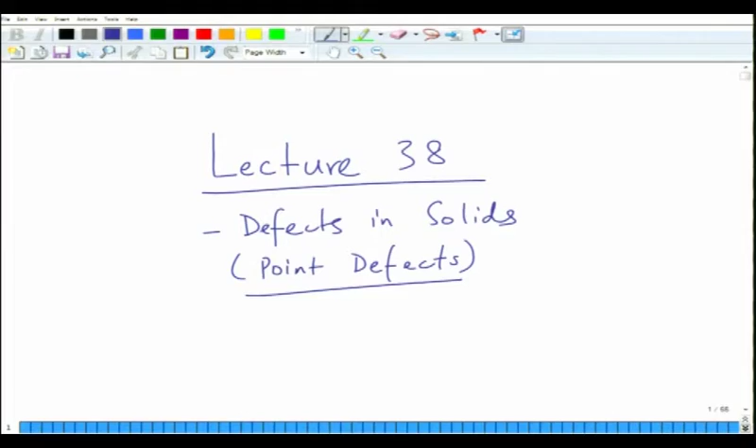Okay, so we now begin with lecture number 38, which is on defects in solids. This is the concluding part of our course, where these last three lectures will conclude this course on structure of materials.

What we have learned so far is about the crystal structures, the lattices, the structure of metals, the structure of alloys, the structure of covalent materials, structure of ceramics, structures of polymers and glasses. And finally, we looked at the structure determination of materials using X-ray diffraction. But so far we have assumed that the structures are perfect, okay. But structures are not perfect, like everything else around us. There are imperfections in crystals, which is what we are going to talk about in these next three lectures.

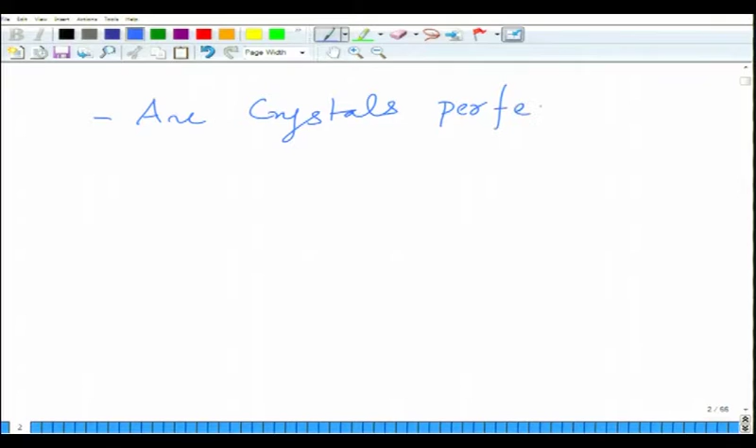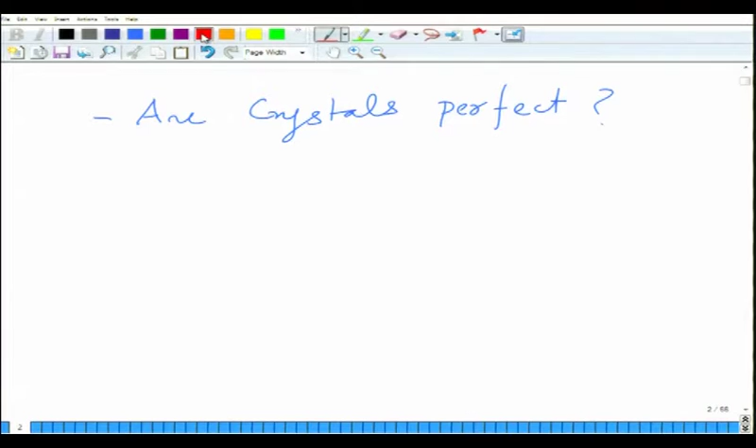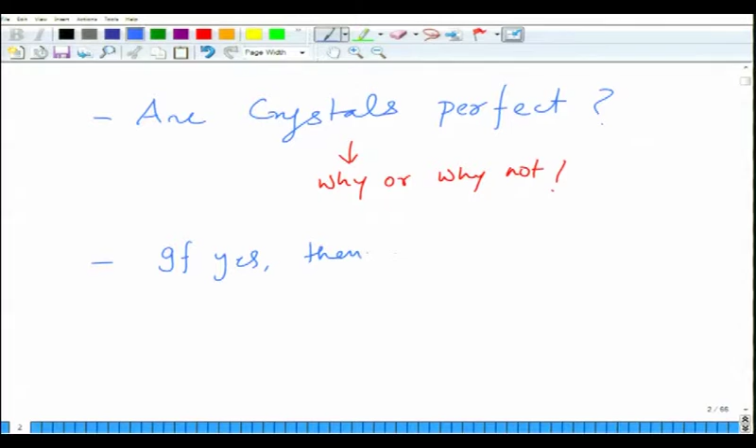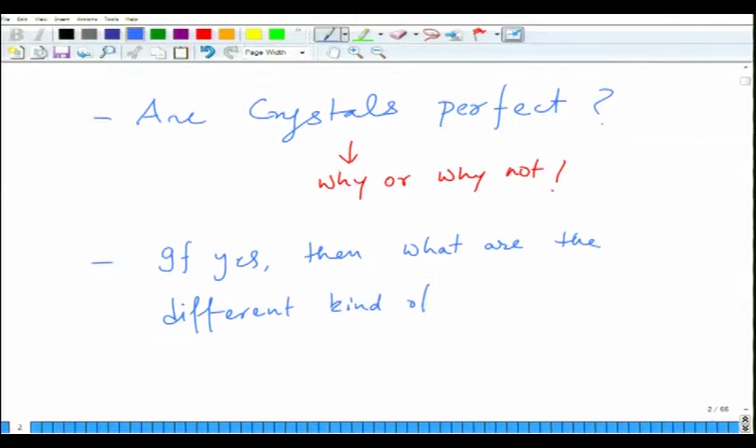So the first question is, are crystals perfect? And the second question that we answer is why, or why not. And then, if they are not perfect, what are the different kinds of defects? So let us first begin with the first question, are the crystals perfect?

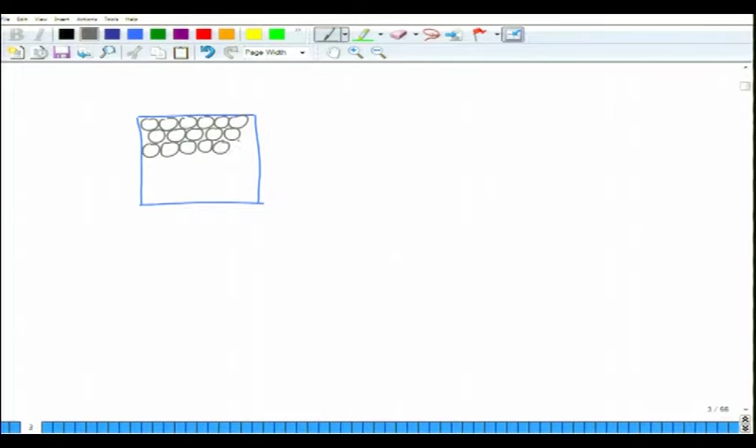Well, before we talk about the defects, let us first look at the atomic arrangement in a perfect material. So let us say we have a material in which atoms are arranged in this fashion, okay. So this is a periodic structure, but it is periodic across the whole volume of the material. So whether it is 1 nanometer, 10 nanometer, 100 nanometer, 1 millimeter, 10 millimeter or 1 meter, wherever you look, the atomic arrangement looks the same. So if it is a layer, it is a layer all throughout that surface of the material, and there is no other orientation that is present.

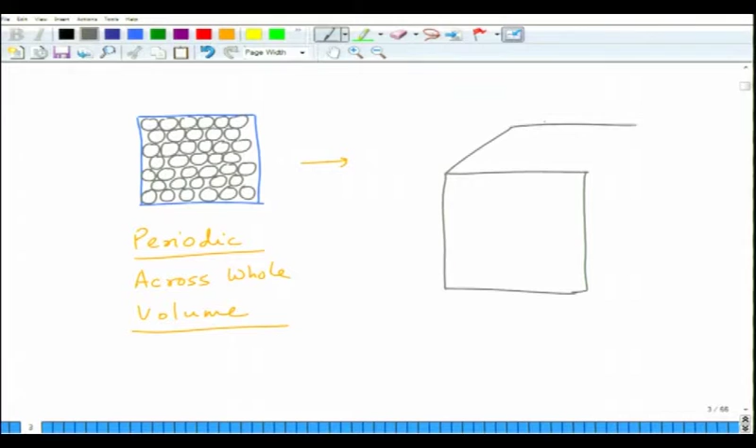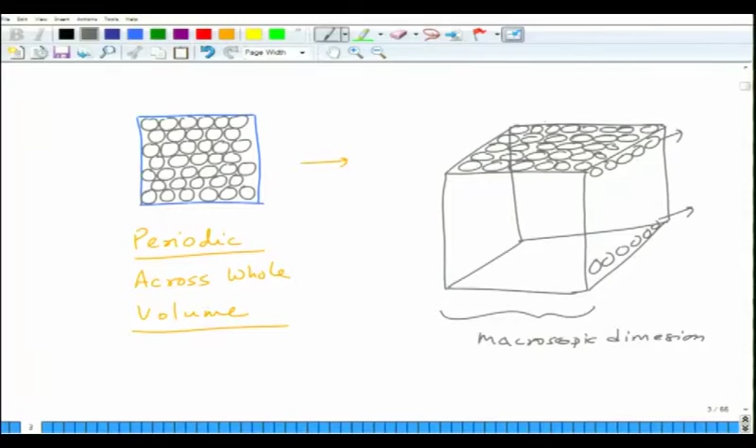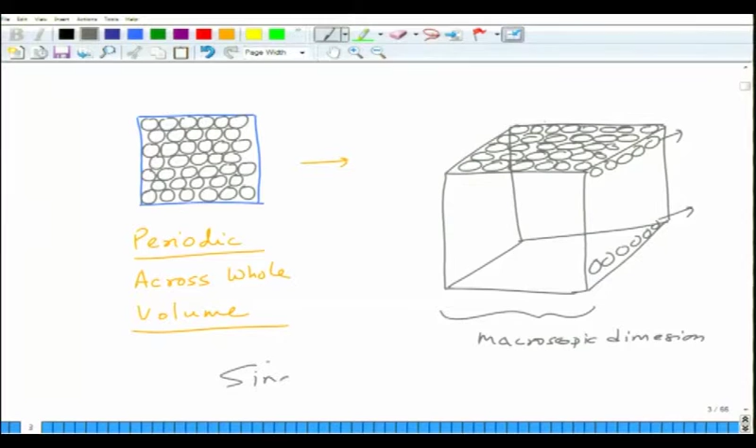If you draw such a crystal, for example, this is your crystal, and these are macroscopic dimensions, okay. And on the faces of the crystal, the atomic arrangement is the same everywhere. Whether you look here or here, it is the same there, okay. So the atomic arrangement on this surface is the same all throughout, similarly on this surface. So this is called a single crystal. There is no discontinuity in the arrangement of atoms, it is uniform all throughout the crystal. These are called single crystals. Now life is not very kind to us in most occasions.

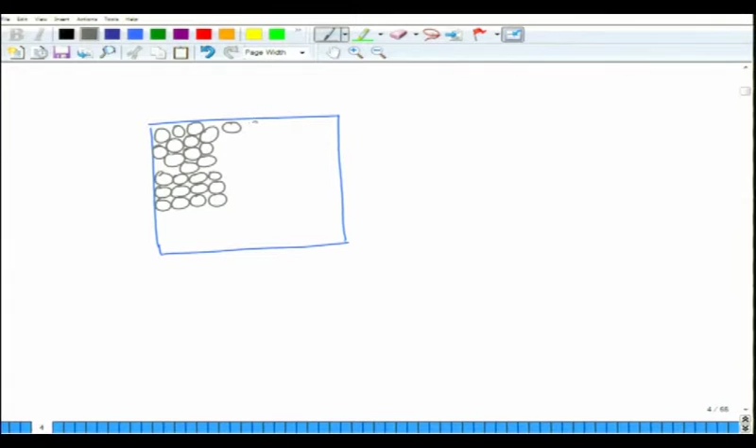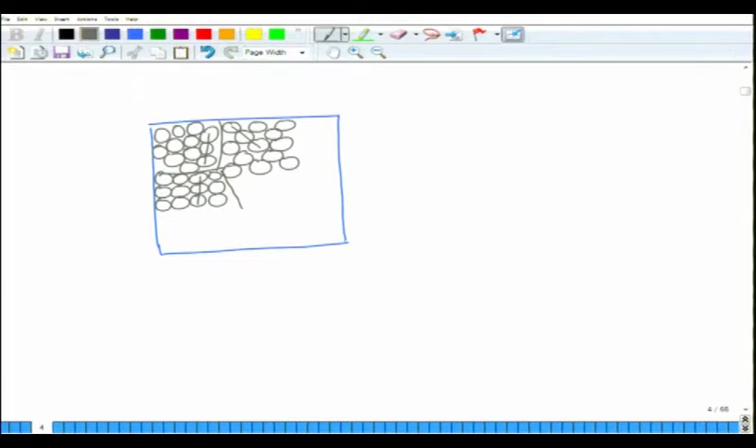What happens in reality in most cases is that materials are like this. You have an enclosed volume like this. Within one volume you may have an arrangement of atoms in this fashion, okay. In the next volume it could be something like this. And in the next one it could be different again. So you can see that there is a distinct change in orientation here, right. This is a different direction and this is a different direction and this is a different direction. You can see there is a distinct change in the orientation of the crystal across the volume. So if you now divide this into several regions, here it is like this, and here it could be some other orientation.

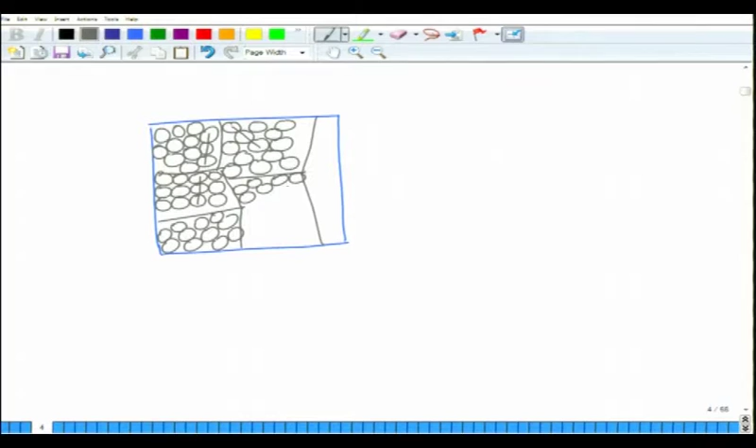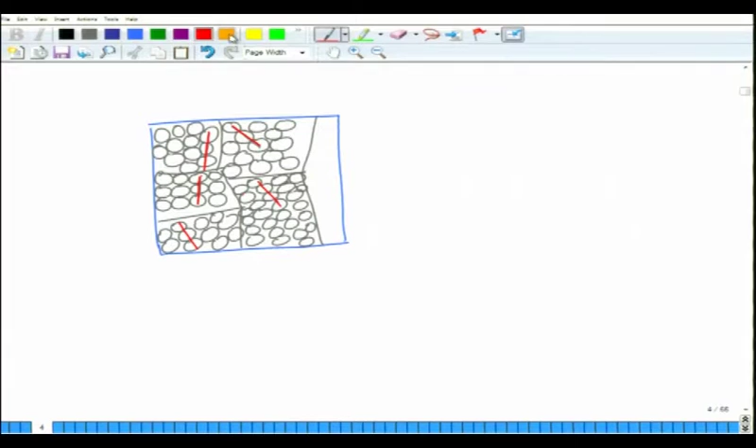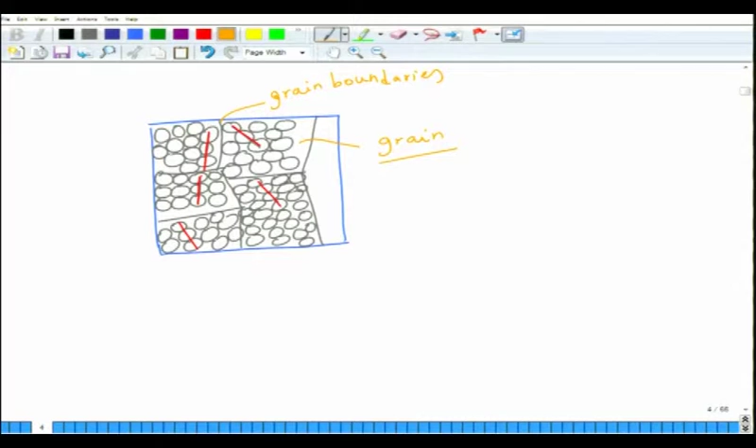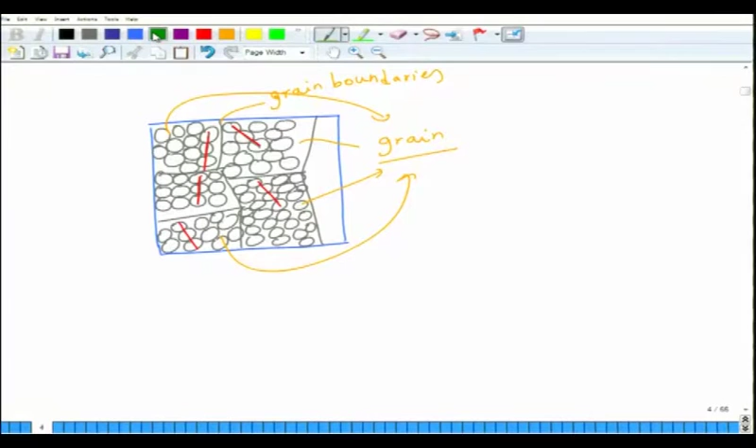If I take only the close packed direction, in this case it happens to be here, in this case it happens to be here, and in this case here. So it is all over the place, right. The same HKL direction has different orientation in different places, and these regions of different crystal orientation are called grains, and the boundaries between them are called grain boundaries. So one region of uniform orientation is called a grain, and where the orientation changes abruptly between the two regions, that is called a grain boundary. So this is a grain, this is a grain, this is a grain, this is a grain, and the discontinuities between them are the grain boundaries. This is called a polycrystal, or you can say a polycrystalline material, okay.

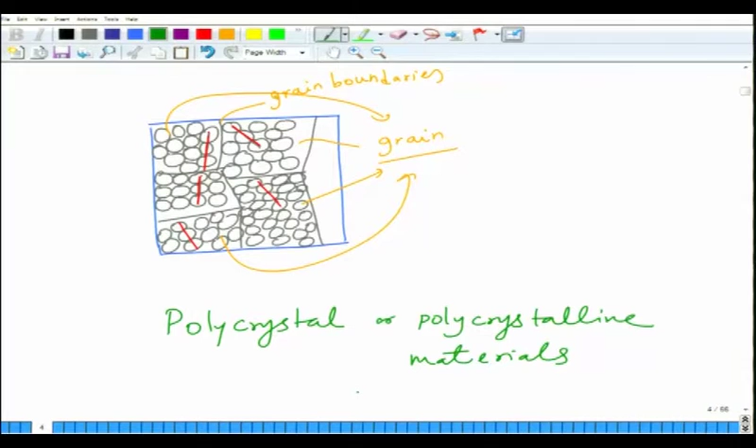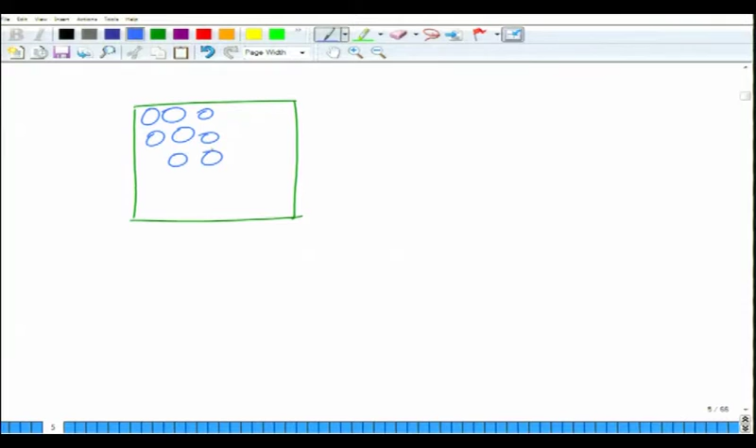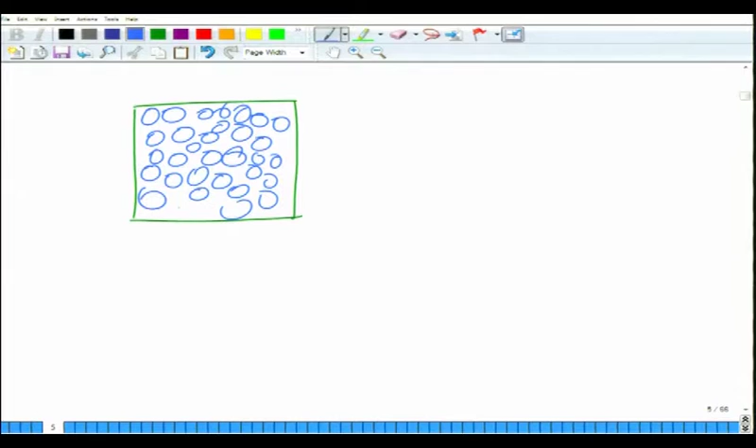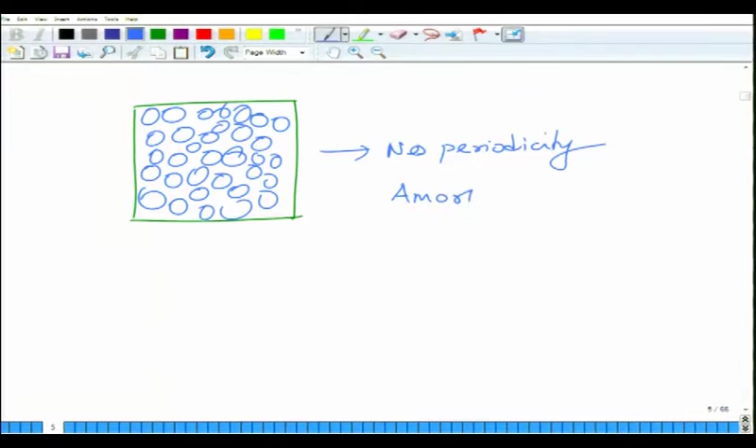Most materials happen to be polycrystalline, okay. So, grain boundaries do exist in most materials, and in some cases you can have atomic structure where there is no periodicity, okay, at least no long range periodicity, and as a result this is called amorphous or glassy solid,

okay. So, these are the three classes of materials which is basically dependent upon the length scales over which the atoms are arranged in a certain fashion. So, in a single crystal the atoms are arranged in a uniform orientation across long length scales, that is what makes a single crystal. It has a uniform orientation all across the surfaces, every face has a specific orientation, a specific arrangement of atoms. In a polycrystal the arrangement continues only within a grain, and the dimension of a grain can vary between a few nanometers to typically a few microns. It could also be a few millimeters, but generally it is limited to microns, okay, a few nanometers to a few microns.

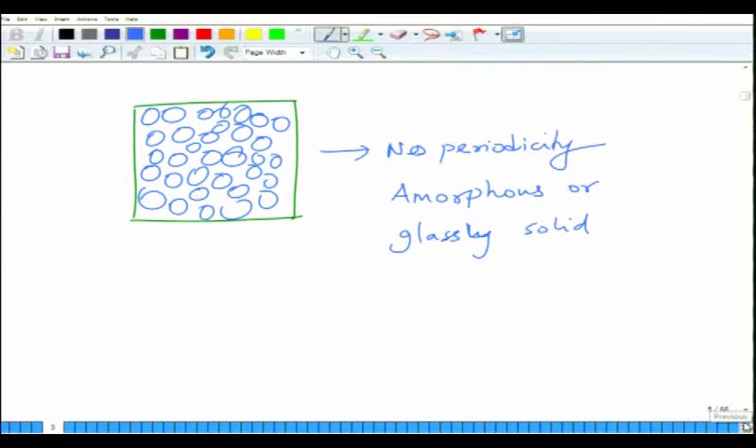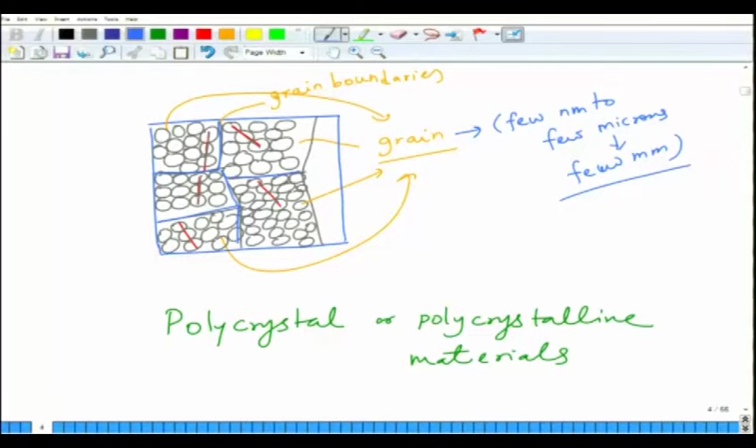This is a polycrystalline material. The moment it goes to millimeters, we call it a quasi single crystal, because you can break the material into small single crystals, okay. So, that is why we say it is a few nanometers to a few hundreds of microns. And then we have absolutely no long range periodicity. There could be periodicity on short scales like 5 nanometers or so, but the moment you cross that barrier there is no periodicity. These are amorphous structures. So, you can see that for example, in this structure there is a discontinuity; these regions are defects, okay, which are called grain boundaries. But there are a lot of other kinds of defects which are present in the materials, as we will see in the next few slides.

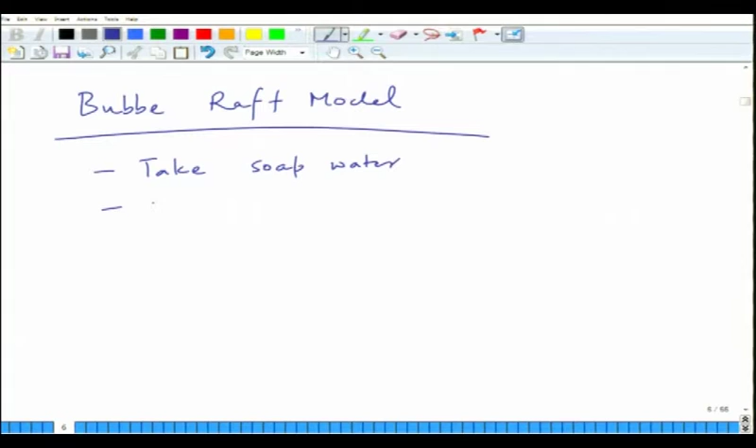So, one of the best representations of defects can be seen in what we call the bubble raft model. What you do is that basically you take soap water. I will just write the steps, okay. Take soap water, using a syringe create bubbles, just blow air into the soapy water, and then bring two rafts. So, rafts are located like this. This is your liquid, these are your rafts. Bring the rafts closer to each other, so that all the bubbles are within a region.

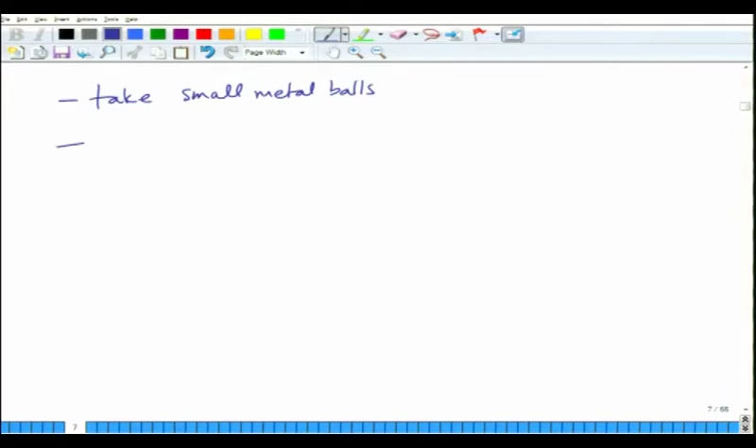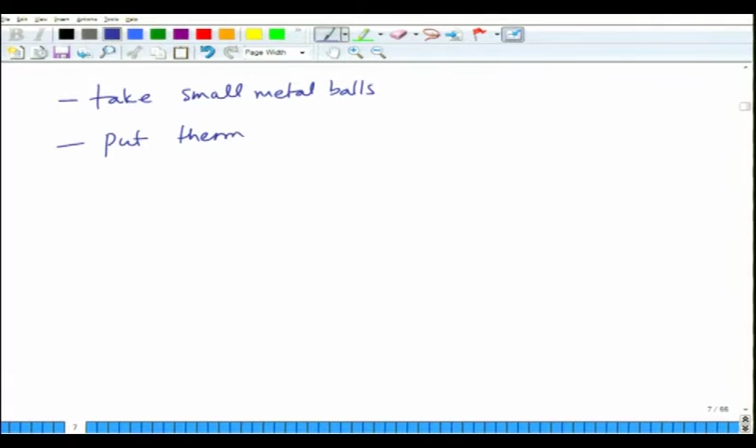Another way to visualize this is to take small metal balls, okay, hundreds of them, and put them between two plastic plates, and the spacing between the plastic plates would be the same as the metal ball, and so you create an enclosure so that it is full of metal balls, and then shake it. Just leave a slight empty space for balls to move around, and then shake it, and then let them settle down on top of each other, and you will see all sorts of defects forming. So put them between two transparent plastic plates.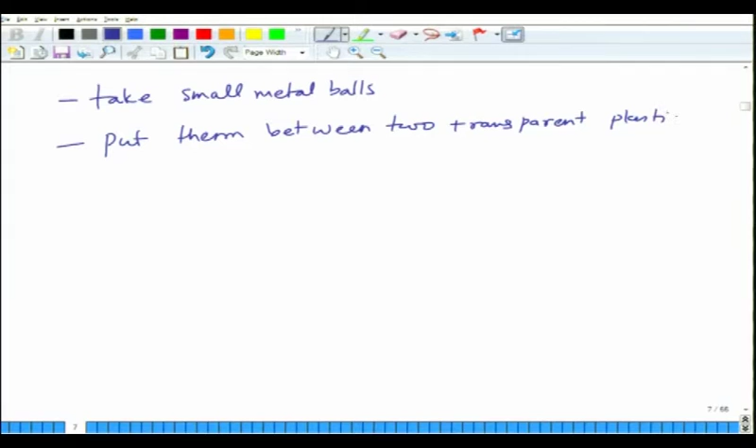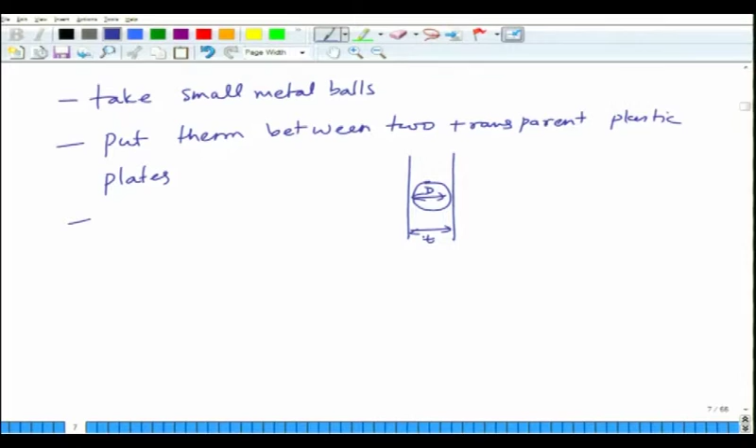So, this is one plate, this is another plate, and the spacing between the plates is the same as the diameter of the ball, okay. So, this is the thickness spacing. So, T is nearly equal to D. Leave some volume free so that balls can move around, shake it,

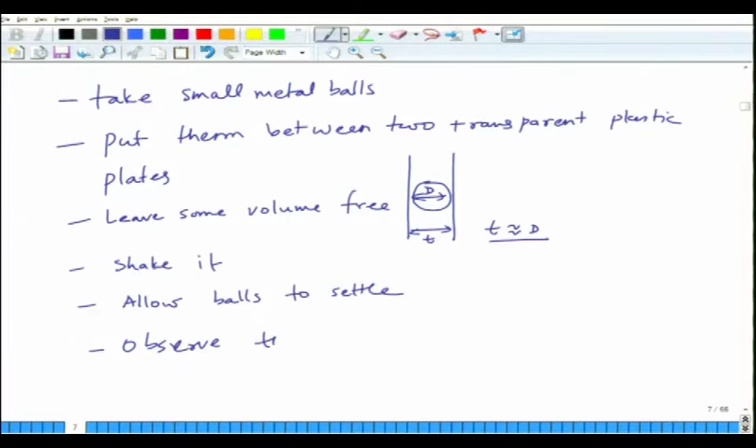and then allow balls to settle, and then observe the arrangement, because each ball can be considered as an atom. You will see a similar kind of pattern as I showed you in the previous slide. So, what you see here will be very much replicated in this. So, this is an experiment you can do at home.

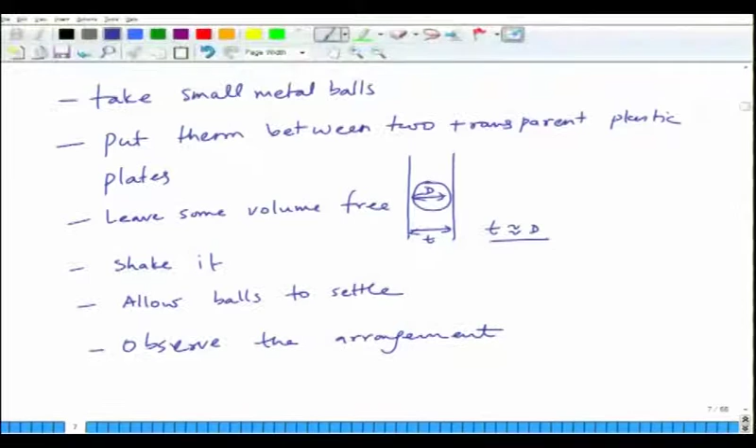Bubble raft model you can also look at, you can go to YouTube, and there are a lot of experiments which have been done using the bubble raft model that you can look at. So, if you do this exercise, what we will see is that there are a few kinds of defects that we observe. The defects that we observe are categorized in 3 categories. First kind of defect that we observe is called a point defect, or 0 dimensional defect. Basically what we see there is a missing atom

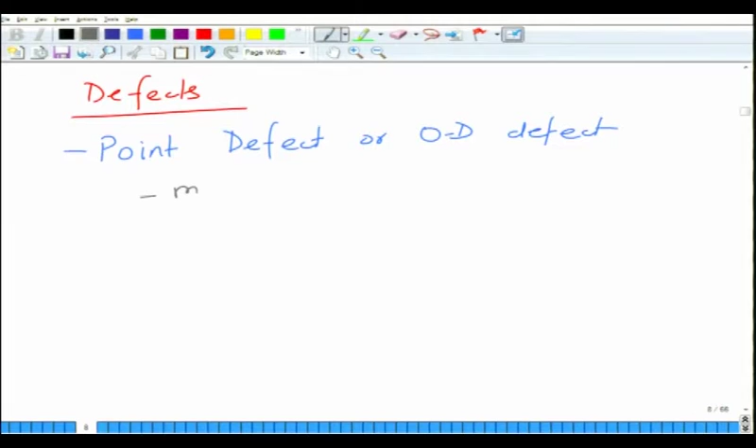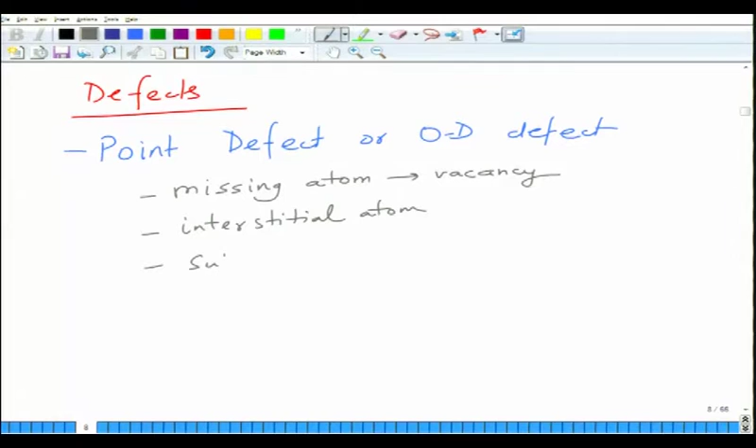which is called a vacancy. So, we are mostly going to talk in terms of metals, but the same could be true about ceramics as well, but making sure the ceramic is electrically neutral. Okay. So, you have a missing atom and then you can have an interstitial atom and you can have a substitutional atom. This would be true in case of metals and other materials. In case of ceramics, you can also have defects such as Frenkel defects and Schottky defects. Ionic solids. Okay.

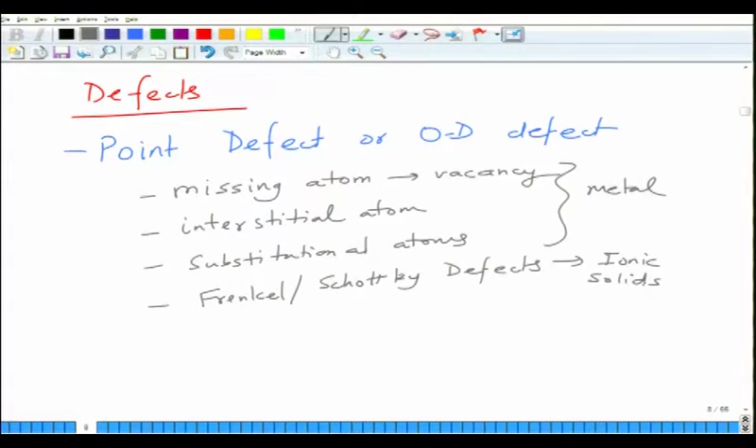The second level of defects in terms of dimensions would be 1D defects, and here we talk about lines. So, these are also called line defects. So, here the categories are edge dislocation and screw dislocation.

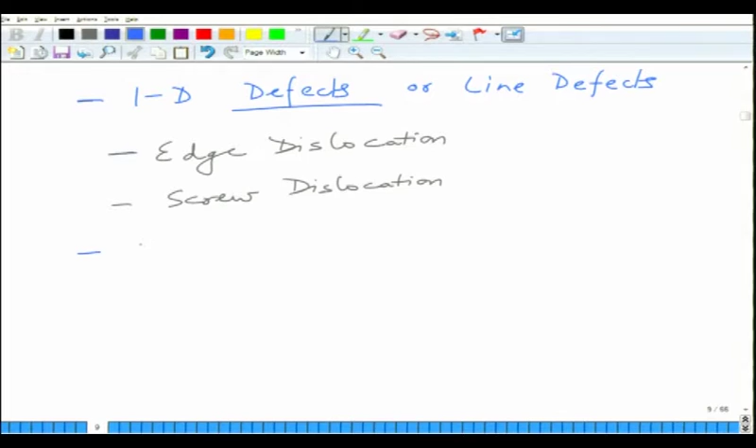And the third category of defects is called 2D defects, or surface defects. Okay. And here we talk of defects such as grain boundaries, in general surfaces, because they have dangling bonds, that is why they are also defects. You can have twin boundaries, you can have stacking faults, etc. There are many other 2D kind of defects. We perhaps would not be able to discuss all of them, but we will see some of them. Okay.

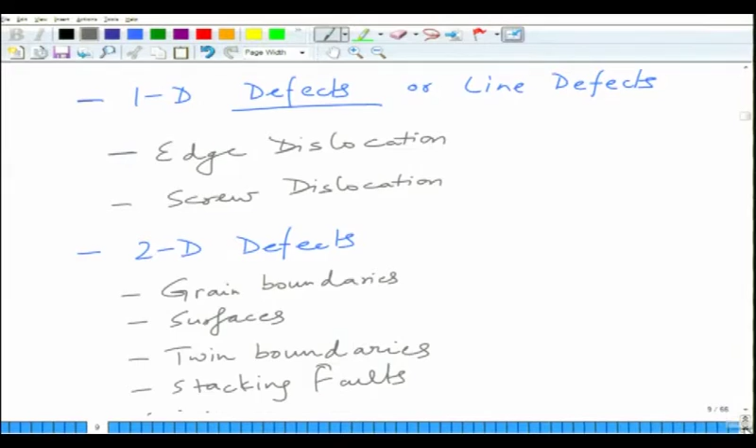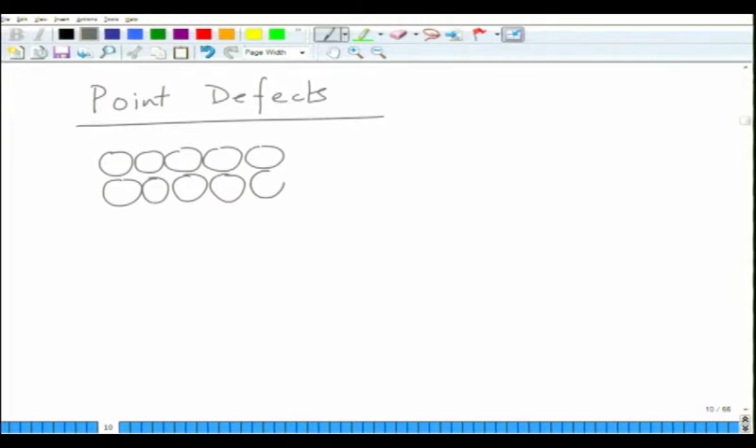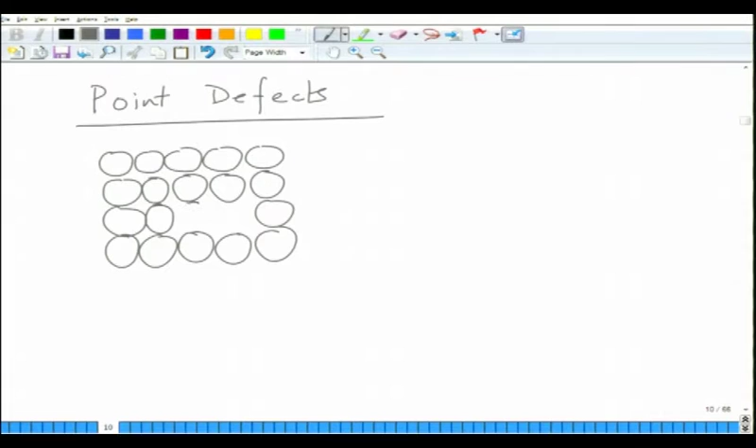So, now let us first begin with the point defects. Okay. So, in this category of defects, we first consider the vacancies. So, vacancy basically could be: you have a structure of atoms like this, they make a periodic structure, and if one of them goes out, let us say this guy goes out. So, this is a vacancy.

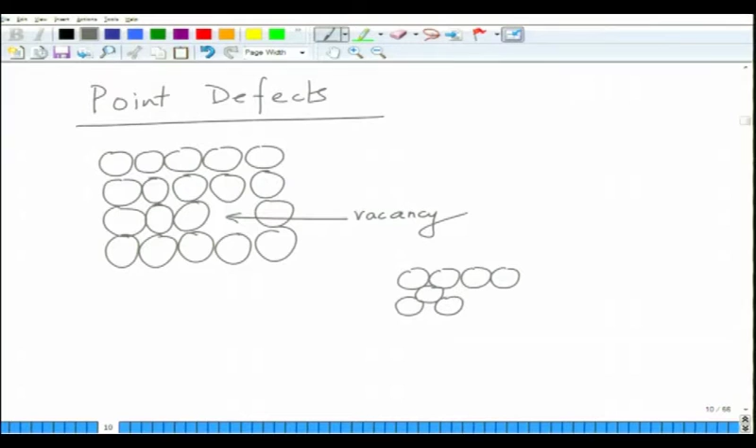Okay. You can have a self interstitial, for instance, you can have a structure again in this fashion. There is one atom of the same type which is squashed somewhere here. As a result, it has dilated the lattice to some extent. So, there is a lattice distortion, this is called a self interstitial.

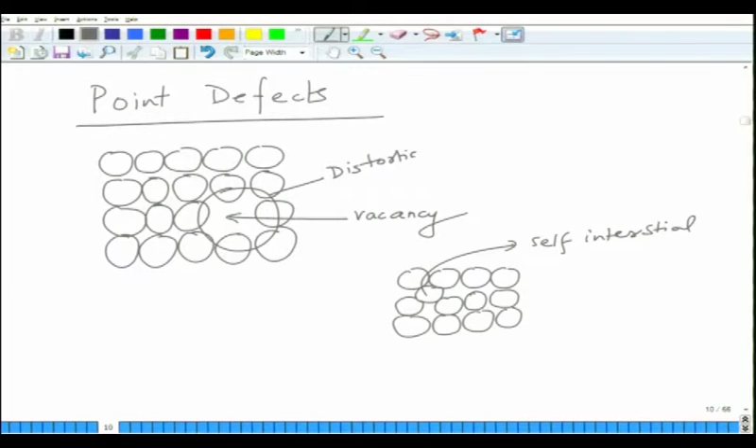So, as you can see, if you have a vacancy, you will have some distortion in the vicinity of the lattice. This will lead to distortion, it will have a strain field. Similarly, if you have this atom, it will lead to distortion, right. So, in one case you will have compressive stresses, in another case you will have tensile stresses. Here you will expand the lattice, as a result the resulting stresses will be compressive stresses. Here you will compress the lattice, as a result the resulting stresses would be tensile stresses. So, they will lead to their own stress fields. So, these are two kinds of defects.

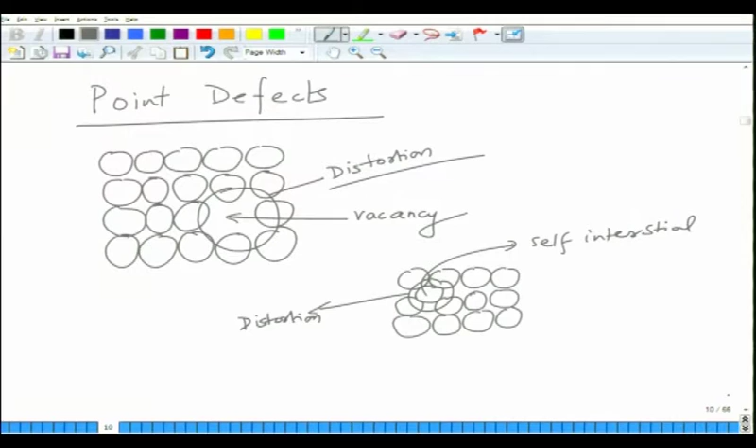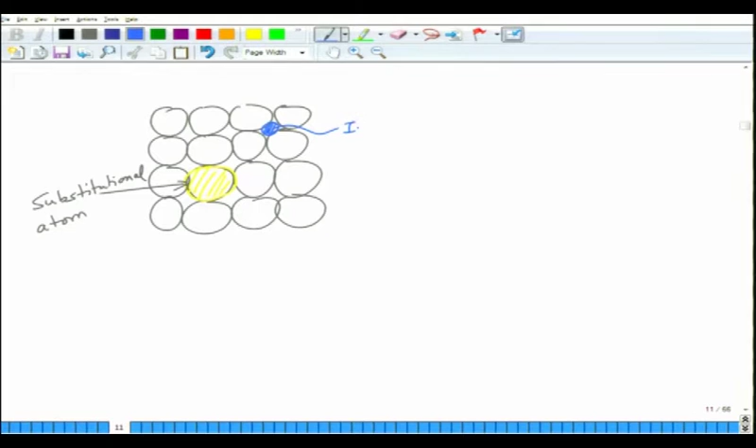It is also a point defect. Depending upon the size of this atom, it can create tensile or compressive stresses. You can have an interstitial atom sitting here, again it would give rise to stresses depending upon the size of this atom with respect to the void size. Okay. So, these are various defects that you may have.

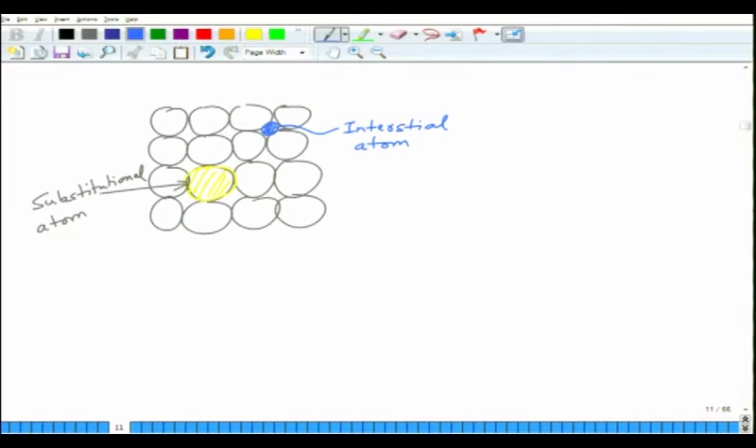These defects may exist together, they may exist independently depending upon the type of impurities that you have present in the material. In case of ionic solids, what might happen is that, so these are the defects which are present in all sorts of materials. As far as ionic solids are concerned, let us say you have an ionic solid. So, the best ionic solid that we know is NaCl. Okay.

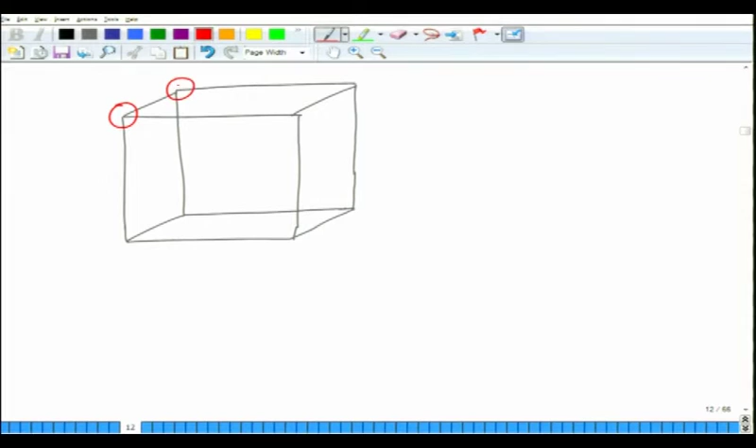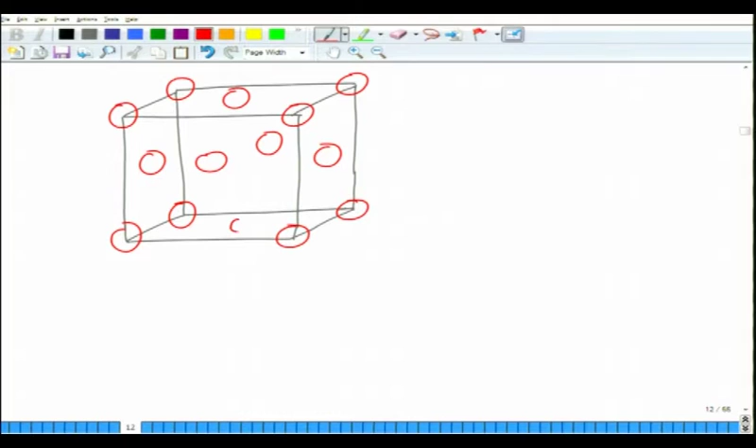So, in NaCl we know that chlorine goes to face centered sites, and sodium goes to interstitial sites, which are these. Okay. Now, here what might happen is that if you remove one of these atoms, then to maintain the electrical neutrality, this also goes away. So, as a result, what you will have is this as a vacant.

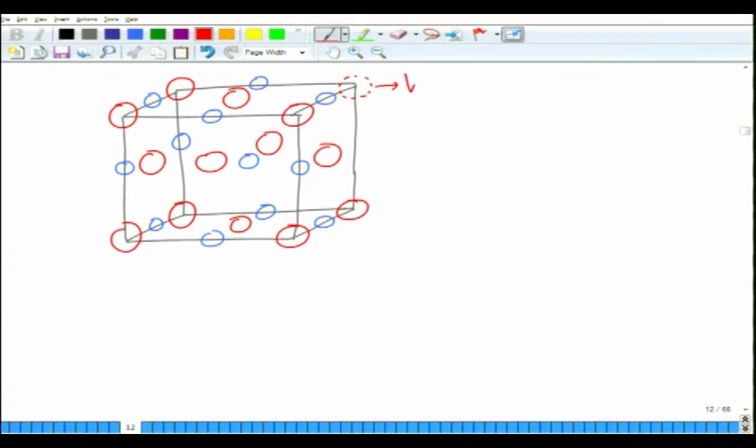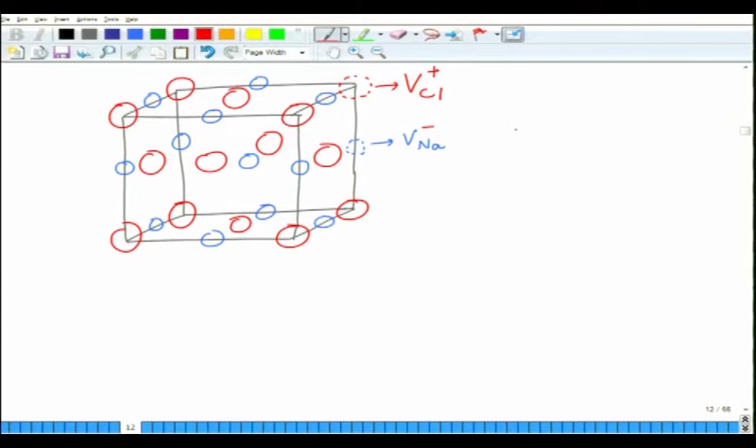So, this is VCl, and what you will have here is VNa, and these are charged. V chlorine is charged oppositely to the chlorine ion. So, this will be positively charged, this will be negatively charged, and the pair of these is called Schottky defects. So, in case of sodium chloride, it would be VNa and VCl. In case of calcium fluoride, it would be VCa minus 2 and 2VF plus 1.

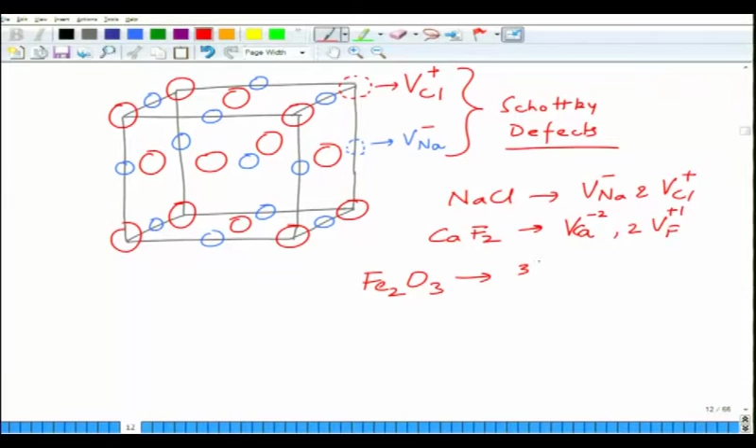If you have Fe2O3, so you have 3 oxygen vacancies, which will give you plus 2, and 2 iron vacancies, which will be minus 3. The charge neutrality is to be maintained. So, you have Fe2O3, which is analogous to saying you have 3 VO 2 plus, 2 VFe 3 minus, or you can say Fe 2/3 O. Okay. So, this becomes VO 2 plus, 2/3 VFe 3 minus, sorry, this will be minus, yeah.

Accordingly, for a solid AmOn, you can have the formulas written, all right. Similarly, you can write for AO2 and things like that. So, this is the way you write the Schottky defect. Then you can have Frenkel defects. Frenkel defects are another kind of defects in which you have, so if you have a solid AX, then

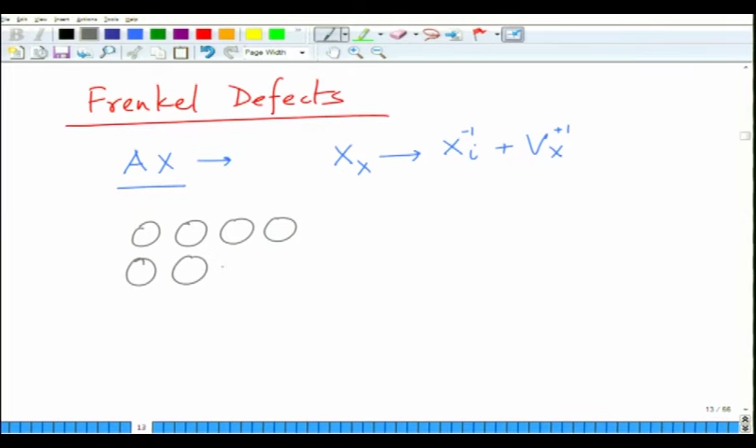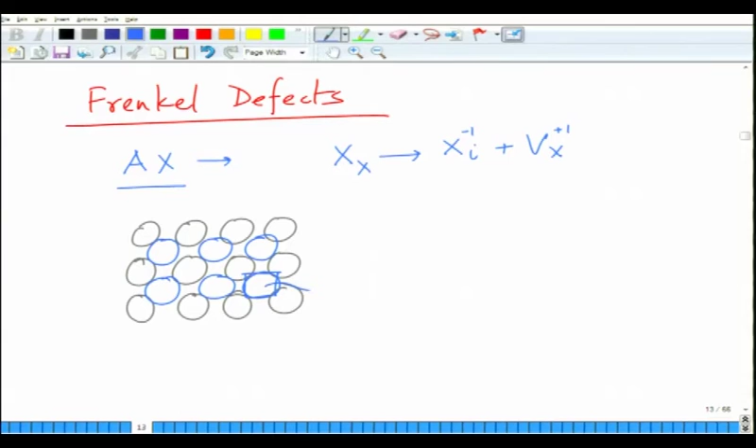the X from X site goes to X interstitial, creating a vacancy of X. Since X is an anion, okay, so in this case Xi would be negatively charged. So, let us say if it is charged 1, then it would be minus 1 and this would be plus 1. So, you can have a structure like this, let us say, okay, your interstitial ion is, this is your X. This X has gone missing from its own site. So, this is now vacant, this is Vx, it has gone somewhere here, this is your Xi, okay. So, this is your interstitial, this is your vacancy.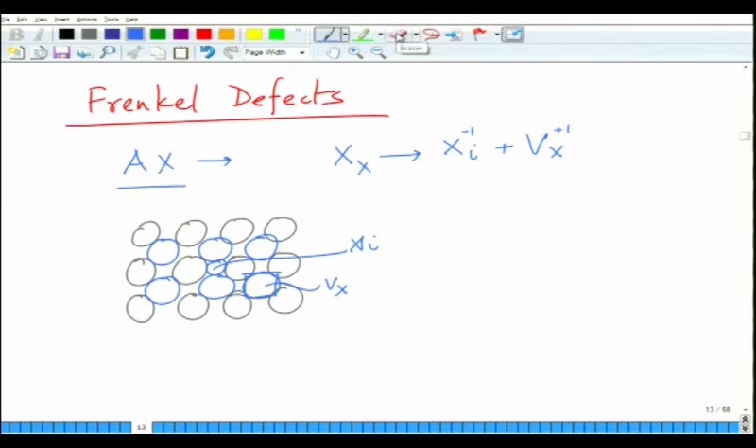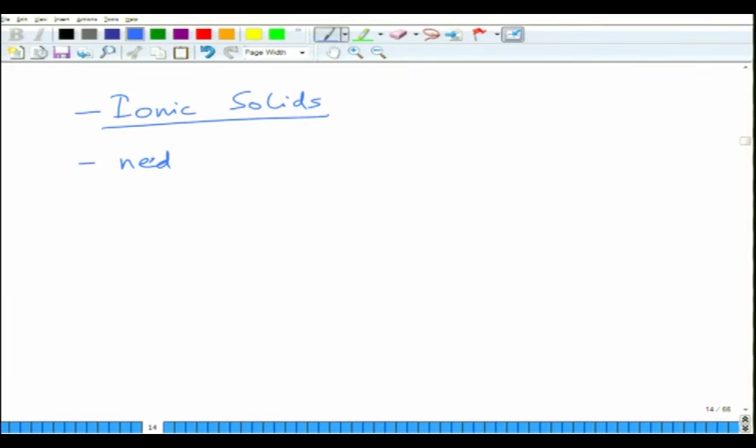So, these are called Frenkel defects, and there is another category called anti-Frenkel defects, if the same happens with the cations, okay. So, what you can have is cation interstitial, cation vacancy, anion interstitial, anion vacancy. So, a variety of defects are possible. In case of ionic solids, it is important that you maintain the charge neutrality. So, ionic solids need to ensure that charge neutrality is maintained and mass is conserved, okay.

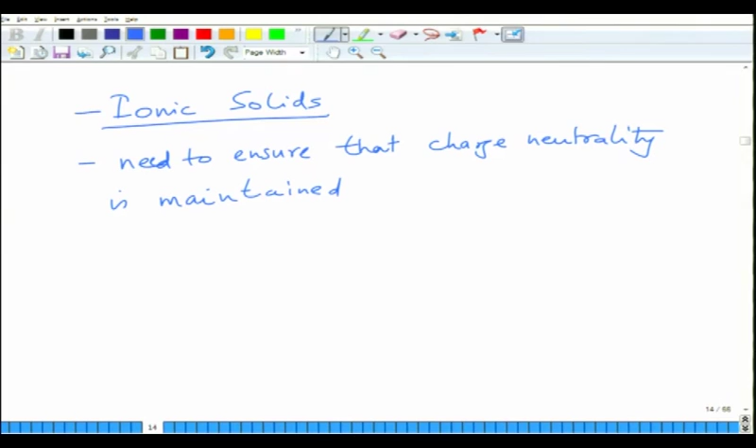So, this is about the point defects. What we will do next is some discussion on the concentration of point defects in a material, and we will also see that these defects are equilibrium defects whose concentration is determined by the temperature. So, at a finite temperature every material will have point defects no matter what the situation is. Point defects, as we will see later on, are thermodynamic defects. You cannot eliminate them, you can reduce their concentration by changing the temperature, but they do exist, okay. So, we will do a simple thermodynamic analysis in the next lecture and calculate their concentration in the materials.